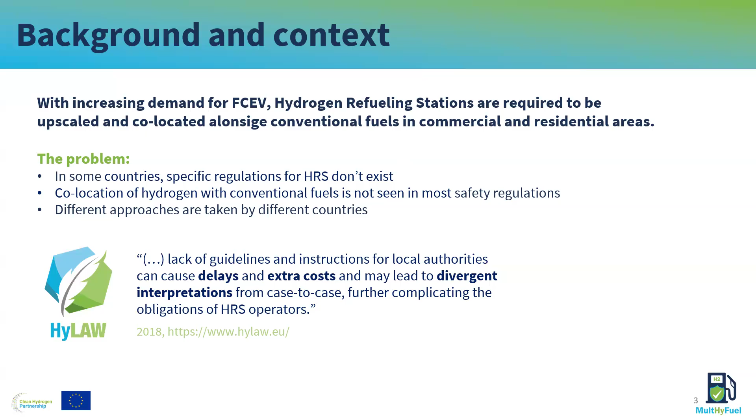The goal, as I mentioned, is to define commonly applicable, effective, and evidence-based guidelines to facilitate the construction of hydrogen refueling stations and multi-fuel refueling stations, in locations which would be suitable to have both.

So what we did was identify relevant gaps in the current legal and administrative framework, which I will present afterwards. We gathered experimental data from engineering research and leaks. We also engaged with relevant stakeholders, a lot of stakeholders, some of which are here with us today. We actually had over 100 applications for registration for this event, so a lot of them are interested.

And of course, we want to successfully disseminate the project's results, so they are available to everybody who is working in the hydrogen refueling and refueling stations sector.

This is our consortium. We have partners from all over Europe, as you can see. Hydrogen Europe is the coordinator of the project, as well as the work package leader of work package 1 and work package 4, where we engage with stakeholders and defined the legal analysis of the situation.

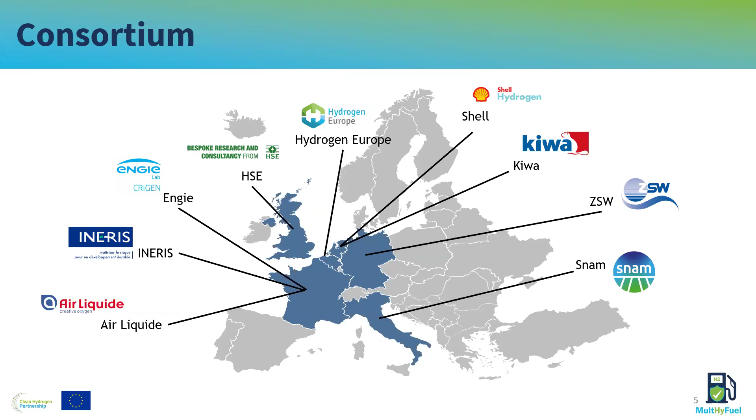Within work package 2, my colleagues will show you and present the practical research done with experimental data they obtained, to address gaps in current understanding of hydrogen refueling stations in general, not necessarily related to multi-fuel stations and co-locations. And of course we have work package 4, which is engagement, where we wanted to engage with the stakeholders.

So with refueling station operators and public authorities, to assist them in deploying this regulatory information and experimental data where they see fit, and how we can try to help them as much as we can.

The project started in 2021, which was quite some time ago. We ended up in September last year. Unfortunately, we had a couple of bottlenecks in between because of COVID, and some additional administrative issues, but we are here at the end and we're trying to present the final outputs, which will be uploaded for everybody's availability.

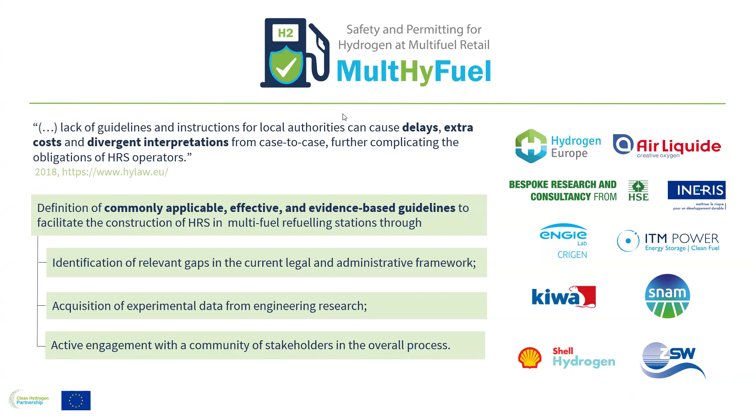So what we did was to examine 14 countries through 14 organizations that we got in touch with. So the national experts that we were in touch with, we asked them to provide us assistance in order to do the comparative assessment and gap analysis.

So we asked them to check the existing permitting requirements for HRS, the risk assessment regulations and methodologies, safety or separation distances, and intervals and content of equipment maintenance. So I marked here France and Netherlands.

My colleague vastly provided information on these two countries. We had most details on these two countries in the last iteration process.

But I will show you the results of everything else as well.

So what we had as feedback is that we had 4 countries with specific HRS regulation and refueling stations which were deployed. We had 7 countries without specific regulation, but with refueling stations deployed, meaning that they had refueling stations implemented, but their regulation was actually based on some other regulation that was available for refueling options. We had, of course, 3 countries without any refueling stations deployed, which also didn't have any regulation implemented for this purpose.

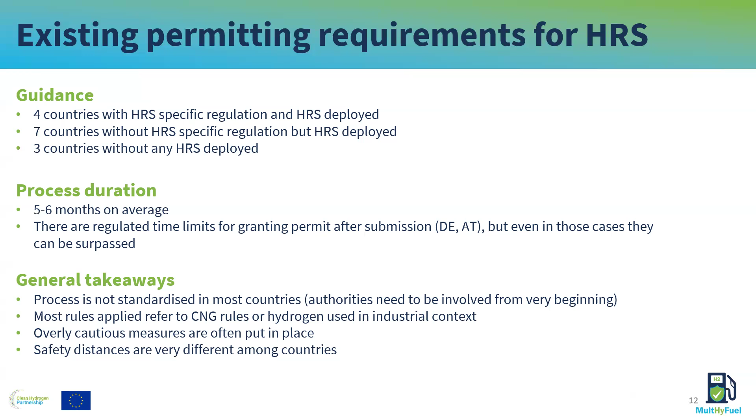Excuse me, Dinko. Apologies for the interruption. There are quite a few people in the lobby waiting to be let onto the webinar. Okay, thank you, Liz. Please feel free to let me know. As I mentioned, this is a bit of an issue since I'm doing this myself and it's challenging to check everything, but thank you a lot.

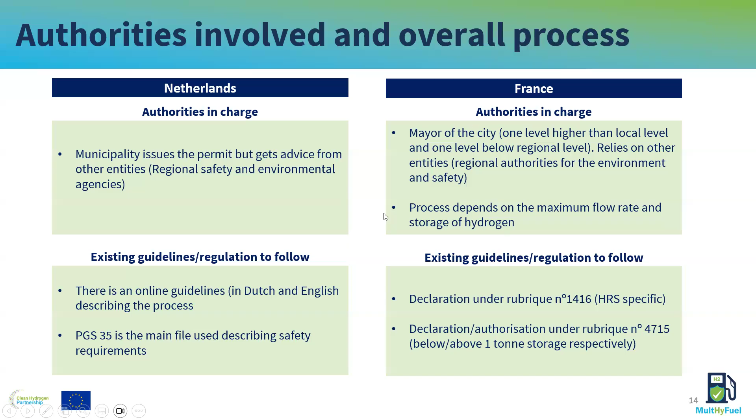Regarding existing guidelines or regulation that needs to be followed, in the Netherlands there is an online guideline with specific information, while in France there is a specific declaration focusing on the hydrogen refueling station itself. Regarding risk assessment methodologies, the Netherlands has the Seveso directive, which refers to ISO standards determining the use of quantitative risk assessment. In France, risk analysis is only mandatory for installations subject to authorization regimes, meaning more than 1 ton of hydrogen storage, if applicable. Below that, it's not required.

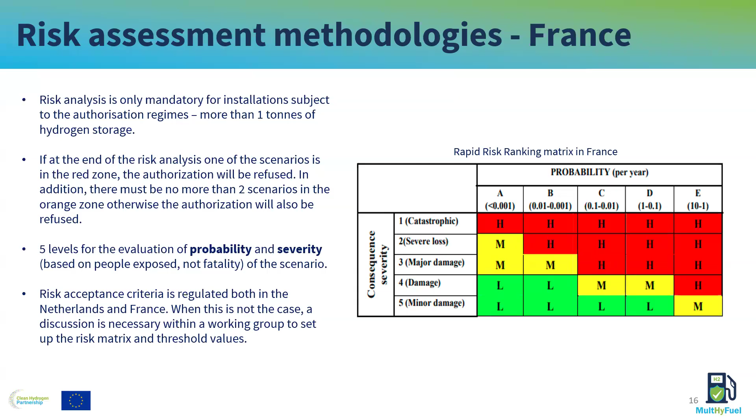I'm not going to go into details regarding these specifics because you can find them in detail for each specific country in the deliverable online, related to permitting requirements. Just as an example for safety distances, the distance between hydrogen storage and pipeline is determined in the Netherlands, while in France there is no prescribed rule. On the other hand, the distance between hydrogen equipment and other fuels is determined in France, while not in the Netherlands.

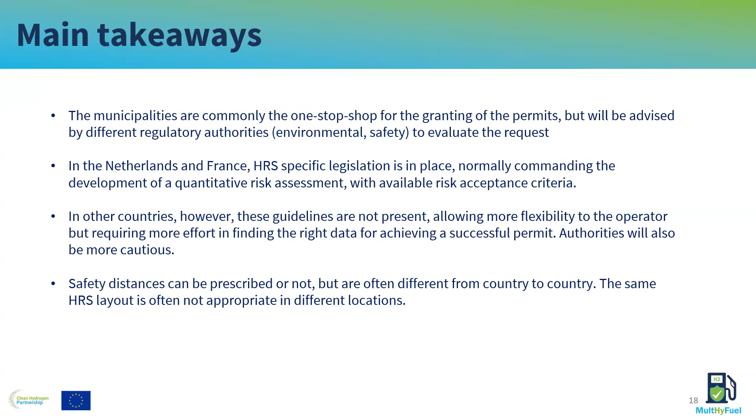The main takeaway from this small example is that some countries have specific hydrogen refueling station legislation in place, normally commanding the development of quantitative risk assessment with available risk acceptance criteria, while other countries do not have these guidelines. This allows more flexibility to operators but requires more effort in finding the right data for achieving a successful permit, including environmental permits specifically. On the other hand, this might be quite challenging because it doesn't give them step-by-step guidelines to implement this information and deploy the hydrogen refueling station.

As mentioned, you can find these detailed documents online: deliverable 1.2 and deliverable 1.4, on permitting requirements and risk assessment methodologies for HRS in the EU. We had the first version with the status in 2021, then the final analysis and comparison of results, covering what happened in the meantime, sometime in 2024. Both documents are publicly available online in detail for the 14 countries, which you can check on the website.

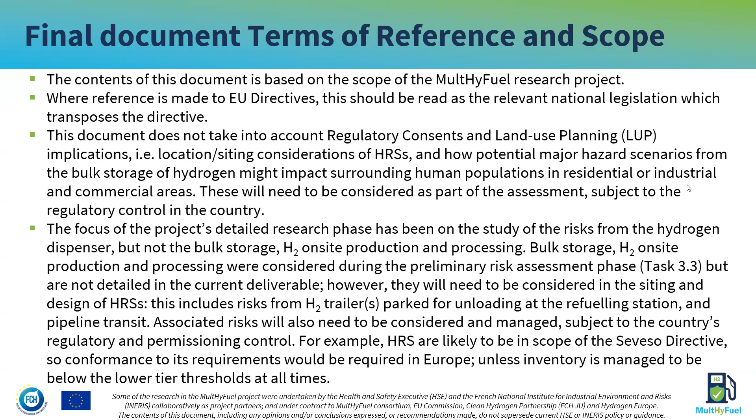Subject to the relevant country's regulatory and permissioning control, associated risks will also need to be considered and managed. For example, hydrogen refueling stations are likely to be in the scope of the Seveso directive, so conformance to its requirements would be required in Europe unless the inventory is managed to be below the lower tier thresholds at all times. Next slide please, Dinko.

Thank you. So we would like to stress that the experimental program within the project did not study liquid hydrogen releases.

Because of the project scope, the findings of the research reported in the deliverable may only be specific to the assumptions made within the risk assessment, consequence modeling, and conditions of the experiments conducted. For example, in our large-scale experiments using the mock-up dispenser system, the release of hydrogen was not sustained at a constant flow rate. There was a measured decay with time as a buffer tank was not used, whereas consequence models typically assume constant release rates.

In addition, weather conditions may have a significant influence on the dispersion results.

One other thing that is also worth pointing out before you read the report: whilst likelihood and potential severity determine the level of risk, the techniques to determine the severity, i.e. the methods to estimate populations exposed to the harm, was not part of the work. Instead, the focus has been on the consequence assessment techniques that form part of the risk assessment process. So what I'm saying will make sense when you come to read the deliverable.

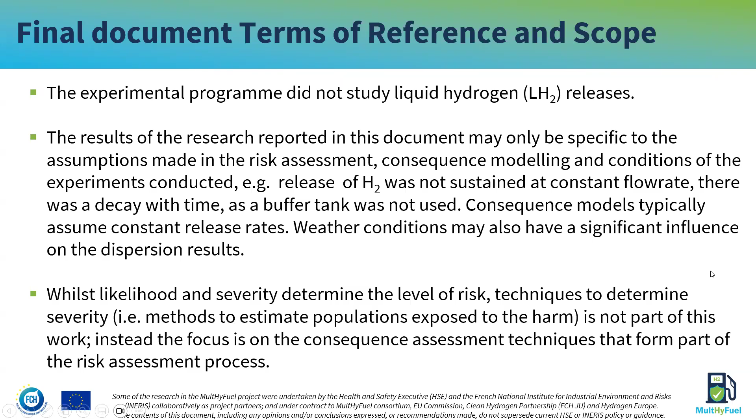The technical recommendations born out of the results of this project would be applicable to similar hydrogen refueling station configurations and dedicated equipment as those studied within the project, i.e. the three configurations covered and described at the start of section 3 of the document, and the assumptions behind this. So application to a larger scope will therefore require dedicated risk assessments and additional validation. It is also important to highlight that the research has been conducted at a high level, hence the findings and recommendations made in this document are at a snapshot in time.

However, we still believe that all the work we have carried out in the last four years and the resultant research findings have not only helped us identify some key technical recommendations, but as with all good research projects, has also helped identify remaining knowledge gaps, which themselves would need further research in order to address and feed into the development and/or improvement of various regulations, codes, and standards. More about this later.

And that's all I have to say really on the structure of the report and its terms of reference, hopefully setting out its scope and context. So I will now hand the floor back to Dinko.

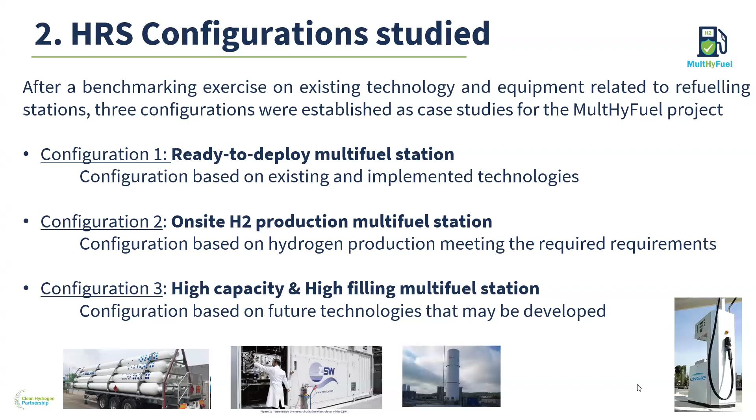You can see at the end the 3 hydrogen configurations. Here is configuration 1. For each configuration, I will introduce on the left part a process, and on the right part a layout. Here you see for configuration 1, the trailer and bottles supply the hydrogen.

We have a compressor because, as you see, the pressure in the trailer is between 200 to 600 bar, and we would like to reach 1000 bar. That's why there is a high pressure compressor, and after that two storages, high pressure storage, then a cooling system to be at the right temperature to fuel the car, and a dispenser. So here is the process.

Now looking on the right at the layout, you see there is one technical zone where you find the storage — the trailer storage, the high pressure storage, the compression skid, the chiller, and the control technical room. On the right side of this layout, you have the dispensers, and you see different colors.

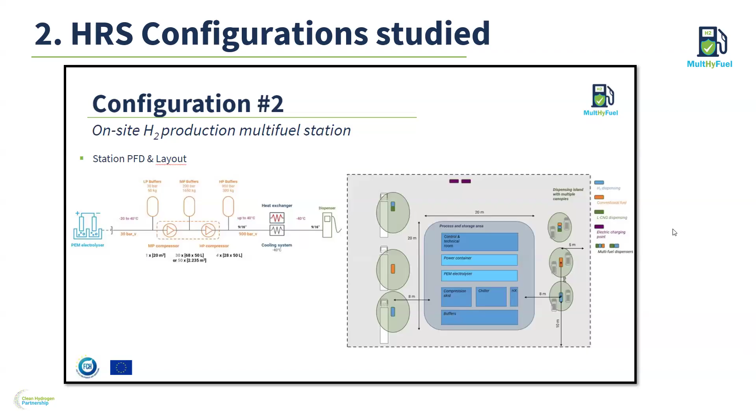On the right side layout, you see in the middle the process and storage area, the technical area, with a production section using a PEM electrolyzer and also the different compressors, storage systems, and chiller. On the left part you have a dispenser for trucks, and on the right part the dispenser for light vehicles, each fueling dispenser dedicated to some fuels.

So we determined, as we saw before, the different configurations. After that, we would like to make a state of the art on risk assessment methodology. To realize this analysis, we looked at scientific articles, but also used lessons learned from partners. We see that when reading these articles about risk assessment of hydrogen refueling stations, risk assessments were realized with HAZID methods or preliminary risk assessment methods. For the database to estimate likelihood, the most used databases were the Purple Book or HyRAM.

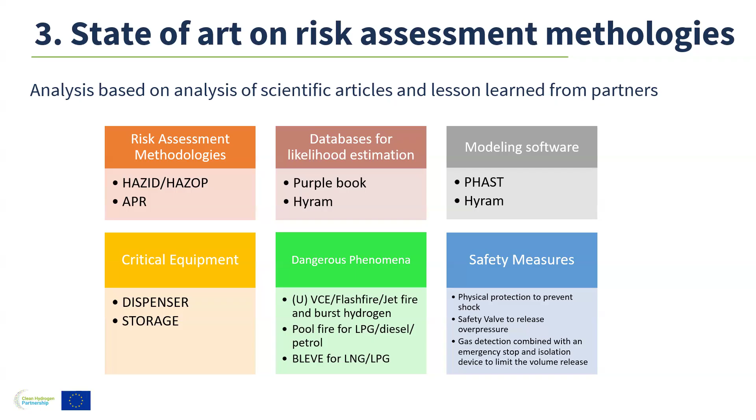The first safety measures recorded in this analysis: physical protection to prevent shock inside the hydrogen refueling stations, safety valves to release overpressure to a vent, or gas detection combined with an emergency stop and isolation device. Next slide, please.

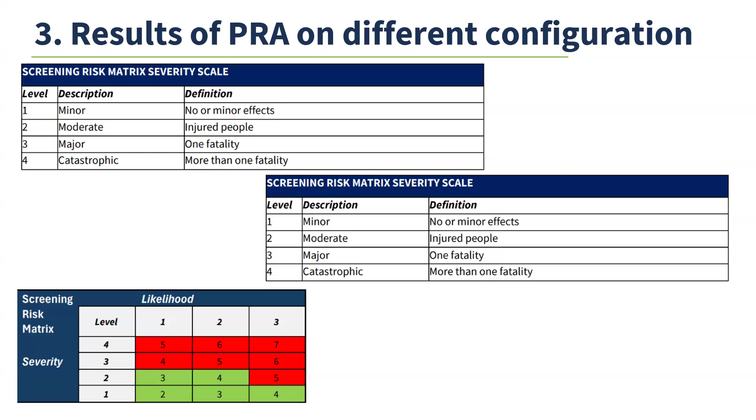Next slide please. So now if we want to rank the different scenarios, we use during the risk assessment different scales. Here you see on the left side the risk matrix for severity, so it was a qualitative scale, just to see, let's go from 1 to 4: 1 minor accidents to 4 catastrophic accidents, where you can have more than one fatality. And after that you have the likelihood system, and above, after we have the criticality, we have both the likelihood and the severity.

What we have in red is because as soon as we have one fatality, we consider that we cannot open the hydrogen refueling station. So here at the end of this analysis, we have 258 dangerous phenomena.

As you see in the different configurations, we have mainly four dangerous phenomena for the three configurations: fire, jet fire, flash fire. We can also have explosions, dangerous phenomena like VCE, UVCE. We can also have asphyxia, fireball, or whipping of hose. So it's common for the three configurations. We also have some dangerous phenomena specific to liquid hydrogen, or others specific for the electrolyzer, like fire due to oxygen enrichment.

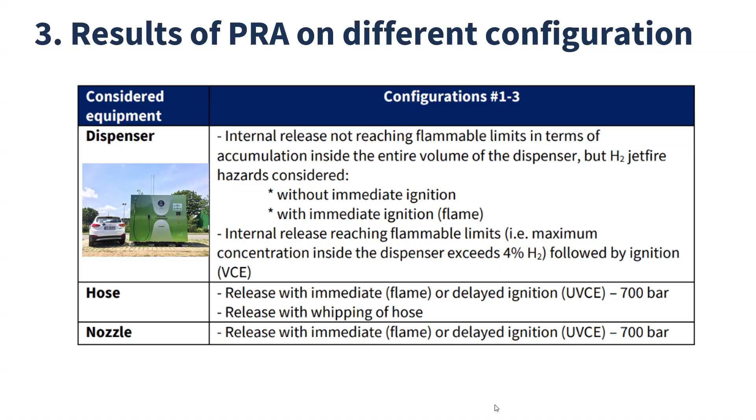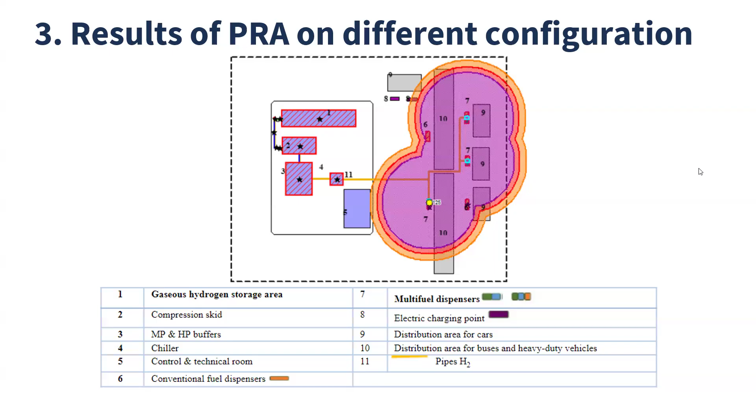Next slide please. And yeah, here with PHAST we determine the severity levels, from moderate for the lower to disastrous for the worst, and we count the number of persons impacted, from significant lethal effect to irreversible effect. And we also, for each dangerous phenomena, use the scale at the bottom to identify the likelihood of each dangerous phenomena. So it's frequency per year, as you can see.

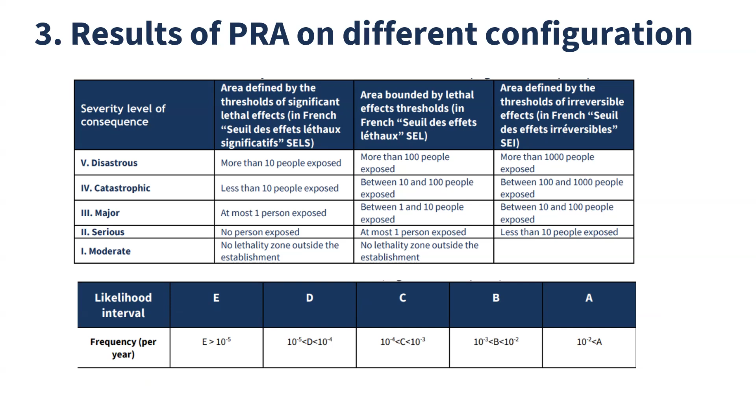I will detail just after how we make the likelihood. So for each dangerous phenomena, each scenario, we classify in this rank. As you see, there is the likelihood from A to E. A is more probable, E is less probable, and disastrous to moderate, so for the severity.

In red, it represents where risk reductions must be implemented. We cannot keep a scenario in this zone. In orange, it's an intermediate risk zone, and we must implement some measures to be as low as reasonably practical. We have to establish good practice if it's possible. So that's the scale we use. Next slide please.

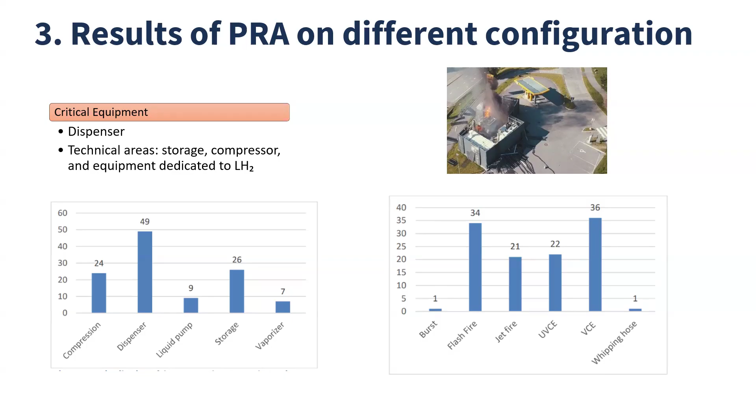Now I will focus on the likelihood. So the estimation of likelihood is a key component of risk assessments. There are a number of different approaches that can be included, but here you see the three main approaches: the frequency statistic, derived from past incidents.

Commonly held in generic failure databases, what we see just after - the Bayesian statistic, which combines both objective and subjective data based on expert judgment or lessons learned from past incidents, and the reliability of structure approach, which combines physical characteristics and probability of human error independent of past incidents.

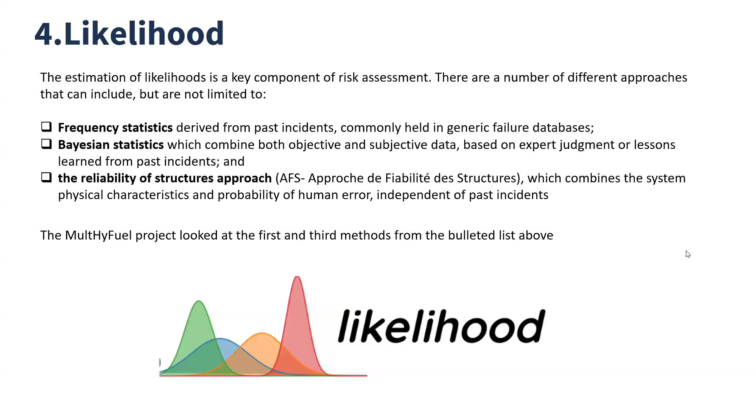In the MultHyFuel project, we use two different methods: the frequency statistic for the first one, and the third one that I will show you just after. Okay, next slide please.

Next slides please. So as you can see, for the generic failure database, the strength is that it's very simple to implement. It's very generalizable. We consider failure modes specific to mechanical components.

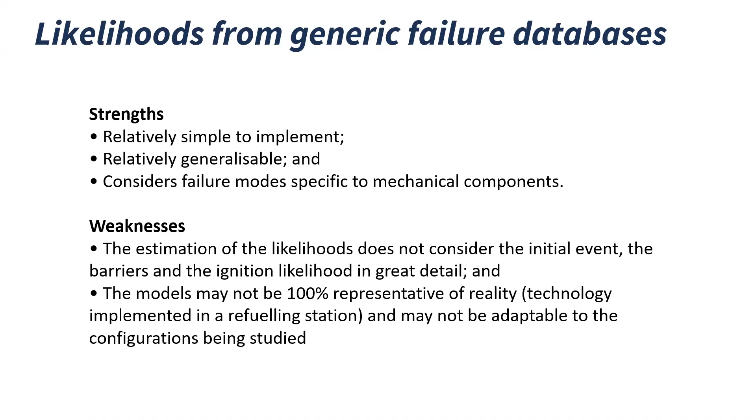So next slide please. That's why we try to have another approach: the reliability of structure approach. Here we like to have an analysis based on the components of operations and to see what can happen. So here, for example, we can have mounting mishap, fatigue, misuse, wear, corrosion, and tightening. And for each different fact we estimate the probability.

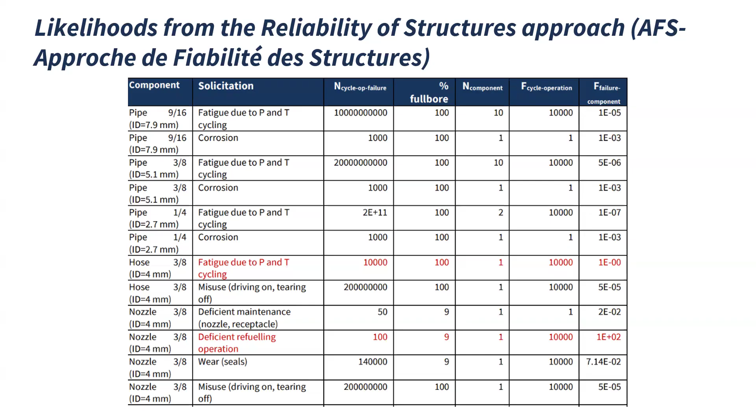Next slide, I will show you in the tables. Here you see the results. So you have the different components on the left side, the different solicitations - fatigue, corrosions. And here on the right side you have the failure of a component. You see, for example, that hose or nozzles are here in red and have a high probability to have failure.

Next slide please. So this strength of this method is taking account of the failure mode specific to each mechanical component. We have a possibility to carry out sensitivity analysis and optimization of certain parameters. We have a quantification of specific degradation mode for each component. We give an accurate picture of the impact of each cause and mode of degradation on overall equipment failure.

But the weakness - it requires a good level of knowledge of mechanical and probabilistic models. There can be significant uncertainty in the numerous input data and also on mathematical models. The models may be difficult to generalize and apply to other configurations. And the deterministic approach and the results correspond to a lifetime, and does not allow you to benefit from the advantage of a probabilistic approach. Next slide please.

So for the conclusions, we developed a new approach for the reliability of structure. We developed a detailed analysis of degradation modes depending on the component present in the system. This approach is new and can be developed in new technology systems. It could also consider more representative estimation of likelihood for hydrogen refueling station accident scenarios. But however, this approach...

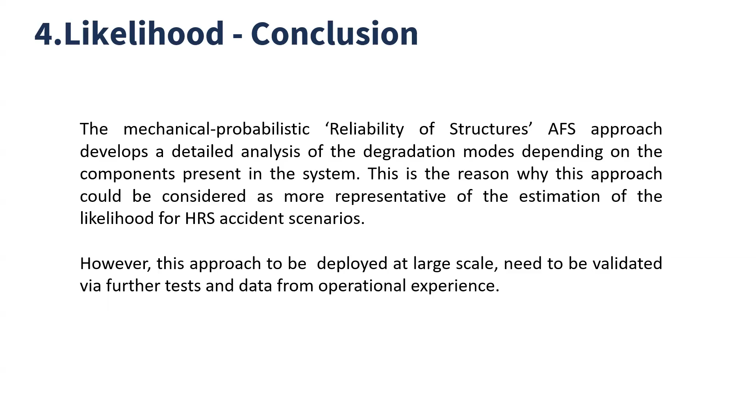We're going to move to the next part, which is the experimental findings that we got. So we heard about the methodological approach, and now we're going to hear about the findings. We have a recording of our colleague Louise, which we will play, where you can see the experiments that were conducted during the project activities. I'm going to find this and start the video. If you don't hear it, please let me know, but you should be able to hear the recording.

I'm Louise O'Sullivan from HSE, the Health and Safety Executive in the UK. I work at the Science and Research Centre at Buxton, and today I'm talking about fire and explosion hazards on a forecourt. I'd like to state as a disclaimer that this presentation doesn't form policy for HSE and isn't current HSE policy guidance. Also, a bit of a noise alert: the third video in contains noise, so if you'd like to adjust your own volume at that point, please feel free to do so. If you're in a shared office, it can be a bit disconcerting for others when they hear that.

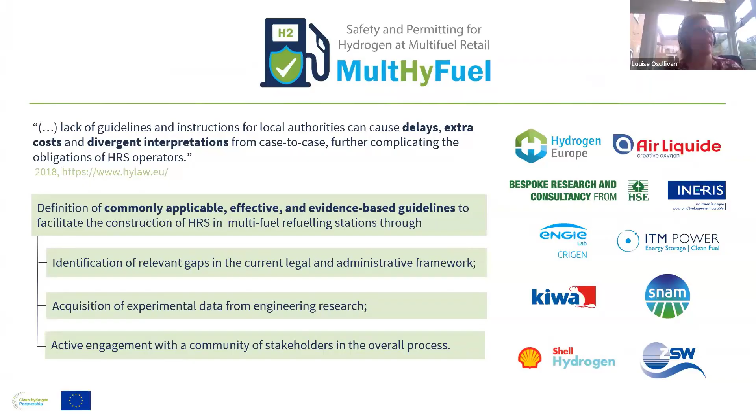Next slide, please, Joanna. Thank you. As Christophe explained to you before, we're working as part of a full consortium on Work Package 2, working with other Work Package 2 leaders, Ineris, Kiwa, ITM Power and Shell, amongst others. Our work has been undertaken to determine leakage frequencies, flow rates and the extent of hazardous zones for faults on HRS plant, as shown previously. But also we've conducted experiments to demonstrate the effect of hazardous occurrences on hydrogen dispensers and how this affects different dispenser types on a forecourt and multi-fuel forecourt scenario.

So how this affects both traditional hydrocarbon fuels and also looking to the future. In the final part of Work Package 2, we will test the performance and reliability of key safety barriers, as identified by Christophe earlier. We've done a little bit of that so far, and I'll be able to show you that in this presentation as well. Next slide, please, Joanna.

So we had to design an experiment, which is quite difficult in terms of a multi-fuel forecourt. We had to work on the experimental design, and we also had to work with other Work Package 2 collaborators to provide experimental evidence as to the effects of hazardous occurrences affecting hydrogen dispensers and other dispensers on a multi-fuel forecourt. So we came up as a consortium with a group of scenarios that could be foreseeable on a multi-fuel forecourt.

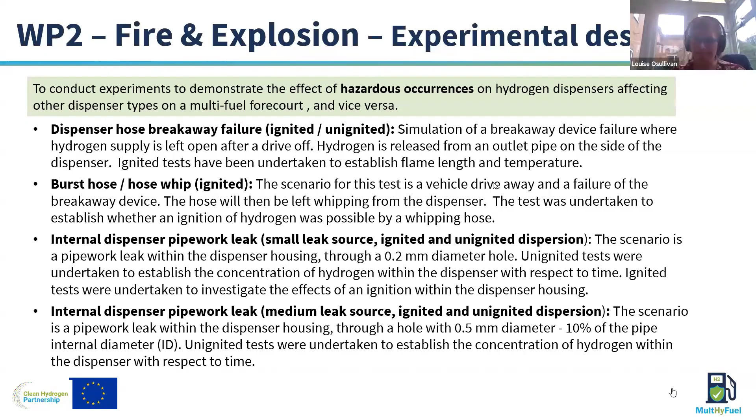We also did tests on internal pipework leaks within the dispenser housing, but placed an ignition source outside of that dispenser housing. A strong ignition source was used in these experiments, and I've got videos of that to come.

And the final experiment we did, because we needed to figure out - if this is a multi-fuel forecourt, a traditional hydrocarbon fuel fire could occur in close proximity to the dispenser, and whether that would cause a leak path on the hydrogen system and become a domino effect for the dispenser.

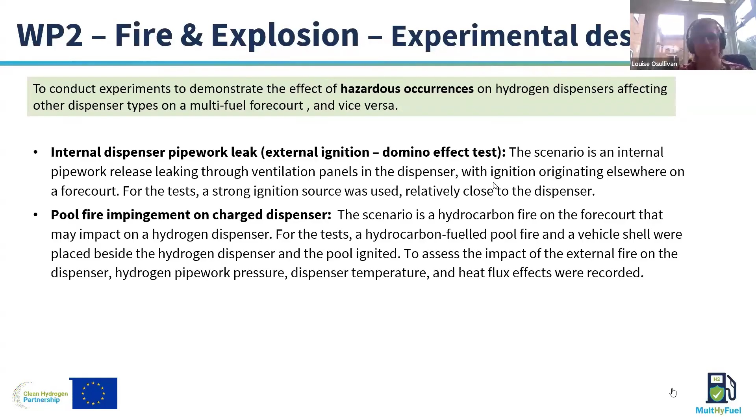Today we're only going to talk about 2 of those tests, as we only have 20 minutes. We're going to talk about internal dispenser pipework leaks with a size of 0.2 millimetre diameter, looking at both unignited tests - those dispersion tests - how much hydrogen can we get through a 0.2 millimetre hole into a dispenser housing with ventilation? What happens when we ignite those, both externally to the dispenser and internally to the dispenser? I'll be able to show you that today.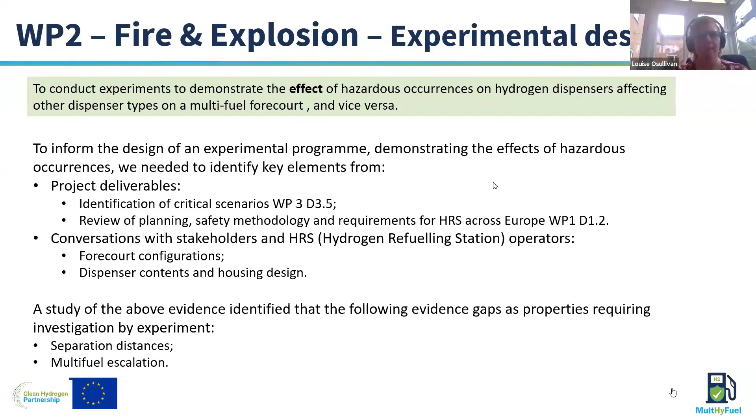So how do we go about this? How did we make this experiment reality? A simplified mock dispenser was agreed with a consortium of height 2 meters tall, 0.5 meter wide and 1 meter long. The housing was made with 1.25 millimeter thick 304 stainless steel, and the internal area is 1 meter cubed. There's ventilation holes at each side of the dispenser, with 2 openings, both top and bottom, on the lateral sides, each 120 millimeters by 100 millimeters. These are representative of passive ventilation that is currently used.

We needed to provide an experiment to estimate the effect of hazardous occurrences. So we needed to create those hazardous occurrences without impacting the safety of ourselves, the equipment, or others on our site. So remote operation of the facility was enabled.

A hose was used to act as a potential breakpoint between the high pressure facility, the image on your left, and the dispenser and simulated forecourt, which is the image on your right.

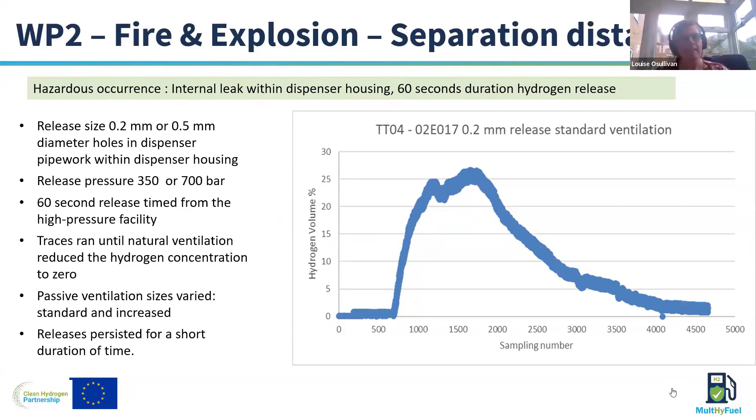This is the first video of today's presentation. We have a leak within the dispenser housing from the pipework at 700 bar with a 0.2 millimeter diameter hole. We've used a strong pyrotechnic ignition source, which was stationed outside of the dispenser.

So what you can see now is that strong pyrotechnic ignition source, hydrogen being released. You then see that hydrogen being ignited and burning back into the dispenser. We can see the flames there, so we know that the hydrogen within that dispenser is still being released, still ignited.

We can see here the temperature generated from that, even after the ignition source has gone and the release is still ongoing, we can see that two-thirds effect. So two-thirds of that dispenser housing is currently very hot. There's a fire in there, it's burnt back to the release, and that's continuing to persist. So that fire will go on for as long as there is a hydrogen source there.

What we can see as well is that the bottom third of the dispenser, which is where a lot of the equipment for this mock-up dispenser is, isn't seeing the same heat. So we're only getting an upward propagating flame, which we expect for hydrogen, but we do have a jet flame there.

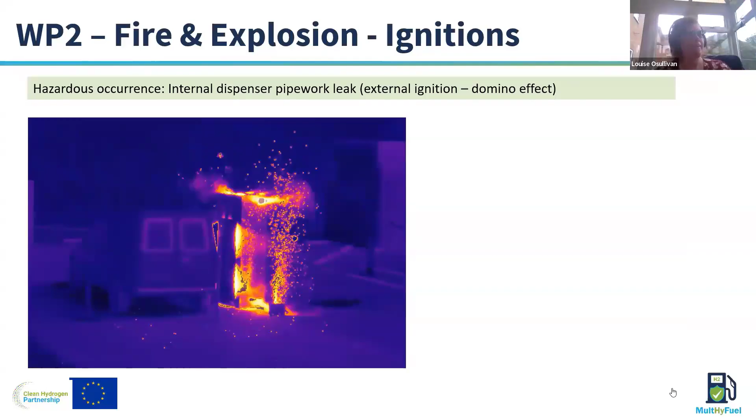But what did it look like inside when it was done? We can see at the bottom there, facing upwards, is the release point. Above that is an aluminium housing, which would usually contain hydrogen sensors and pieces of equipment. That's all burnt out because the hydrogen ignition burned back to the release and a jet fire from there persisted. That actually sprayed the aluminium all over the top of the dispenser as well.

Slightly above it was an electronics cabinet. That was actually a powder coated intumescent cabinet, and you can see that's been blown open with heat. You can see the intumescent coating has started to form its char, that started to burn away as well. So anything within that electronics cabinet, that's all been on fire, that's gone.

Has my sound come back?

Looking towards the dispenser, we can see that the roof of the dispenser has remained intact, but we do know that all the payment points and electronics within that dispenser will have been burned in this process.

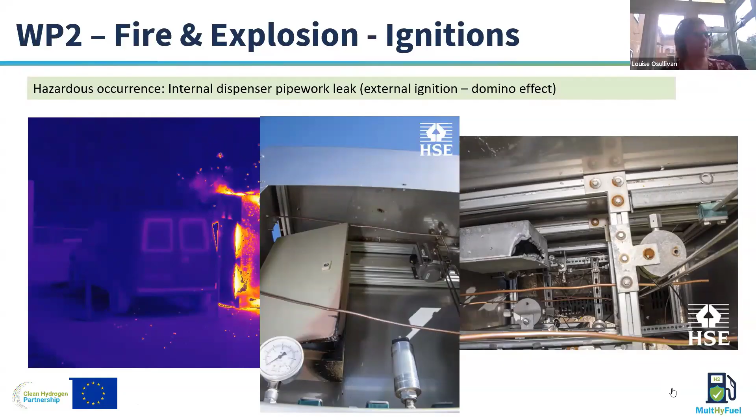This is a second test we undertook - a small pipework leak, 0.2 millimetre diameter hole, occurring on the dispenser pipework within the dispenser housing. We'd already undertaken non-ignited tests to establish the concentration of hydrogen within the dispenser housing, and we know that's around 26% in this case. We then did ignited tests to investigate the effects of ignition within the dispenser. This test was a 60-second release of hydrogen with ignition, along with another 60-second release of hydrogen.

This is in high speed, 1,000 frames, and what we're going to see is the internal ignition of the hydrogen. So what we've seen there is an internal ignition of the hydrogen at that 26%.

We've seen the door rapidly ejected from the dispenser housing, impacting the side of the van stationed there for refueling. You can also see the dispenser housing rocking backwards and forwards on its mountings - and this is on very strong mountings, which is something we will look to for work package 3. We've seen the rest of the dispenser housing distorted and what's happened to the lid there. So that's what happens with an internal ignition with no mitigation in that system.

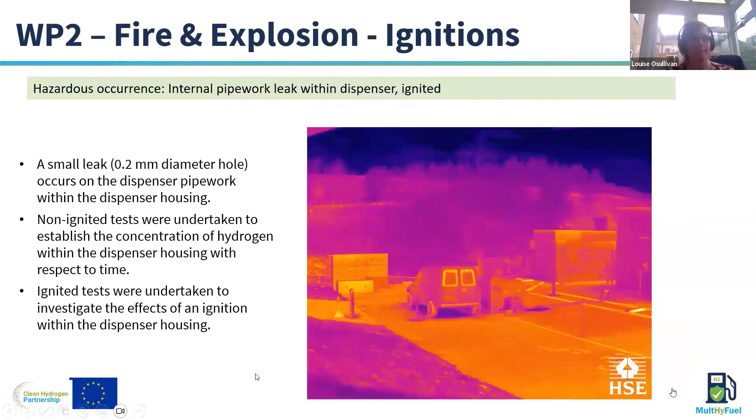So what does this look like when we look at it in our IR mode? Okay, so that's real time, so we can see how quick this event happens. There's no chance of escaping that situation.

The doors hit the side of the van. This is where we can really see with that persistent release what's going on. We can see yet again we've got a sustained fire, which is being burnt back to the release and continues to burn through the dispenser. We can see that damage to the dispenser, and the lid has been partially blown away, with flames coming through it and out from the front of the dispenser. But the fire hazard is located primarily around that dispenser and hasn't protruded further out. We see that the heating effect to the van is relatively minor - we're not really seeing that van heat up at this point.

So a few more photos as to what happened. The impact to the van was of sufficient force to warp the reinforcement in the van to the side of the wheel arch - we can see that's all distorted. If this were a car, the windows in the back door would have shattered with the impact force. The impact effects were also seen on the dispenser door, which when removed remained in the impacted shape. That shape you see in the van and in that dispenser door remained the case.

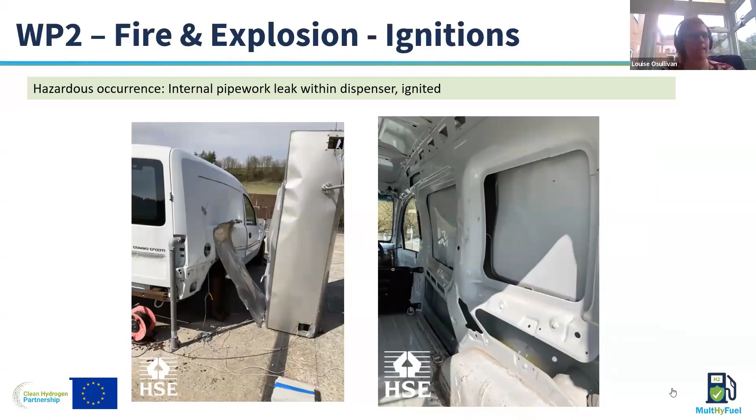So what happened to the rest of the dispenser? We can see there are several points where the dispenser has bowed and popped. The housing popped away from the skid, and that was connected at 6 points down the back of each panel - so it was really well attached. We could also see that the lid on top of the dispenser, which we had used for increasing ventilation, has also popped away from its fixings - there were 6 of those but it hadn't fully removed. I think this is partially due to the vent line in the top not occurring, and also that front door provided all the pressure relief needed for it to remain partially attached. But it was a large amount of pressure generation in that system.

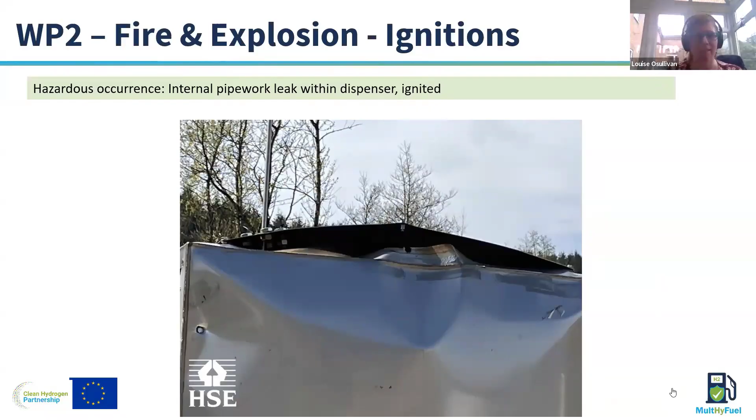The pressure wave exerted on the forecourt was not sufficient to cause primary blast injuries. However, secondary blast effect - i.e. impact from the dispenser door or a structural forecourt item which has been impacted by a piece of the dispenser housing - would be sufficient to cause serious harm or fatality. The ejection of the dispenser door occurred with overpressures of 620 millibar. The distance between the van and the dispenser was 0.8 of a metre.

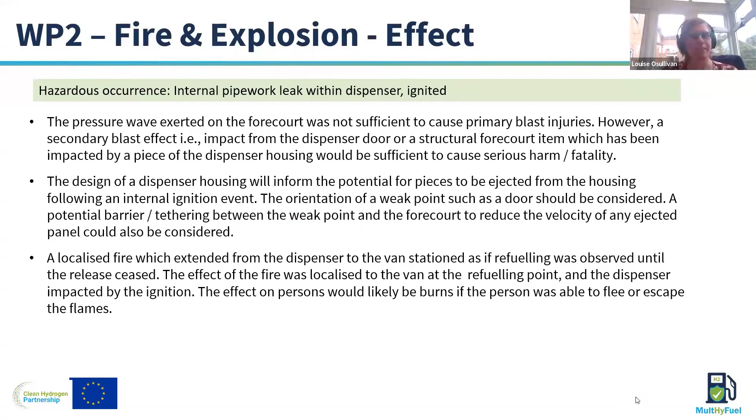So we started to talk with Christoph about what mitigations could be used to prevent the most hazardous consequences on a forecourt. So we installed a foil blowout panel at the top of the dispenser, replacing the original steel lid. We did the scenario again to determine whether this was adequate mitigation of the scenario. This is the video that's got the noise on. So if you're prepared to reduce your noise levels on your own control, Joanna, if you want to press go.

And if we stop there, Joanna. Thank you. So what did we see there? We saw that the top foil panel blew out as we expected it to do, to provide that mitigation. We saw that the door distorts with the pressure generated from an internal ignition, but the door wasn't removed. So the inclusion of a foil panel did prevent ejection of the door. It gives a bit more possibility of escape, and it's preventing some of those secondary blast effects from occurring. The dispenser also remains on its mount. We haven't got a rocking dispenser this time. We've got a more controlled situation.

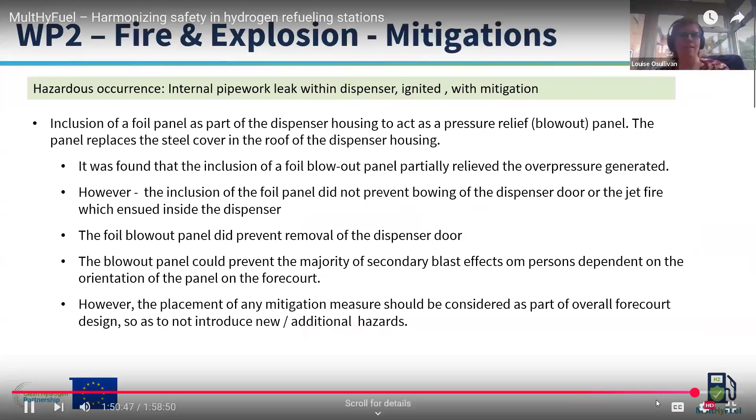So what we saw, the inclusion of a foil panel as part of the dispenser housing to act as a pressure relief or blowout panel, did improve the situation. We found that it partially relieved all the overpressure generated. However, it did not prevent the bowing of the dispenser door or the jet fire which ensued inside the dispenser. So we still got that jet fire, we still got big damage inside the dispenser housing.

The blowout panel could prevent the majority of secondary blast effects on persons, depending on its orientation on the forecourt, and that's something we really need to be mindful of. However, the placement of that mitigation measure should be considered as part of the overall forecourt design, as it could introduce different hazards.

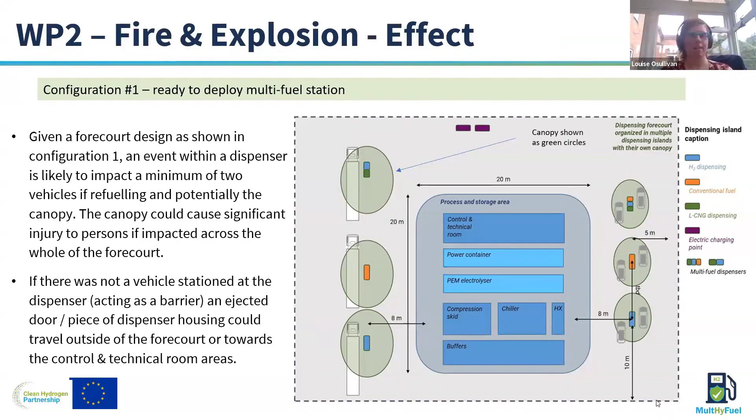So we spoke about, and Sebastian presented earlier, the different configurations. This is configuration one, a ready to deploy multi-fuel station, and the green circles there are individual canopies as shown. So if we think about how this may affect the results we've seen, and may affect the deployment of a multi-fuel station. On the right of this picture, you can see there are multiple dispensers in a line between the cars. And obviously, if you're getting a blowout of a dispenser such as that, there is potential for that to escalate to other dispenser types and potentially increase the likelihood of a domino effect.

If there was not a vehicle stationed at the dispenser acting as a barrier, that ejected piece of the dispenser could travel outside of the forecourt or towards different technical and control rooms as well.

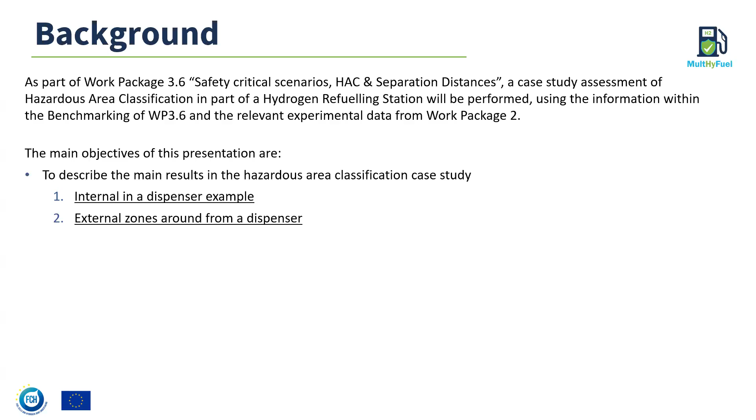Excellent. So next slide, please. So what I am going to present is part of the work that we did as part of Work Package 3.6, that was basically using the good practices, the standards, but in addition, relevant experimental data from Work Package 2, in order to create examples of hazardous area classification. We divided this into internals of the dispenser, what will be the zone inside the dispenser for a specific type of release, and external zones was the second part, what will be the zone around the dispenser because of leaks or because of a vent scenario.

Before doing that, we did a benchmarking and reviewed different points, definitions, hole sizes, and methodologies for zones of the vent. The main aim was to gather a lot of information on hole size and use it for different applications. This is part of one of our deliverables. What we found was that there are several hole sizes used in the industry, most based on 2 or 3 specific values, but there is still some harmonization to be done, and some of that doesn't necessarily apply or were based on hydrogen technologies.

So if you can move to the next slide, Dinko, please. This is the standard suggested values, which depend on the operation, and they depend as well on the type of parts. So that goes from 0.025 millimeters squared up to, depending on the operation, 0.25 millimeters squared, or even bigger if there are other parameters.

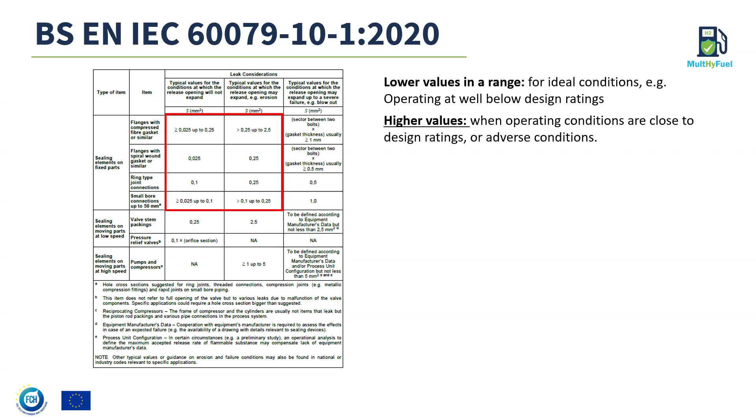So what we did was we took several of these values and tried to do a hazardous area classification example, using the different hole sizes that we found, in order to give a sensitivity and show what would be the effect.

So what we did was we followed the main requirements of the international standard IEC 60079-10-1. We followed the annexes in order to determine the zones and the degree of dilution, but as well, when we're dealing with external releases, we used Quadvent and Phast methods, and we determined the zone and the extent.

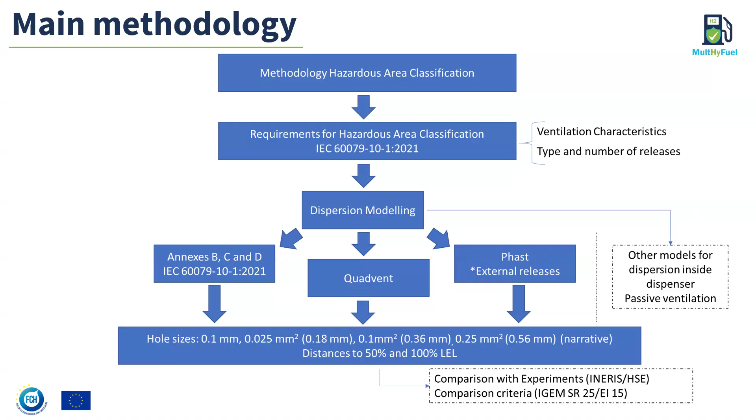The aim of this project is not to suggest a specific hole size to be used, but rather show what will be the conclusion using the different hole sizes found in the literature, and give some guidance on what parameters need to be considered in order to select this. But it is up to each designer to decide which is the most appropriate hole size that will define their technology. What is the main case?

We took a simplified volume, very simple. We assumed a rectangular one with minimum elements inside, and we determined the internal zone if there is natural ventilation. If we assume that forced ventilation is possible, what will be the requirements in order to move the zone? Then we determined external zones, especially from leak points around the hose, around the receptacle, and the nozzle. As well, we analyzed venting the system.

So I will mainly discuss here, because of time, the internal releases. If you can go to the next slide, please.

So, internal releases - what we did was try to determine internally what will be the degree of dilution. For that, we estimated the natural ventilation we expect to have, as well as what will be the release rate inside, in order to determine the zone.

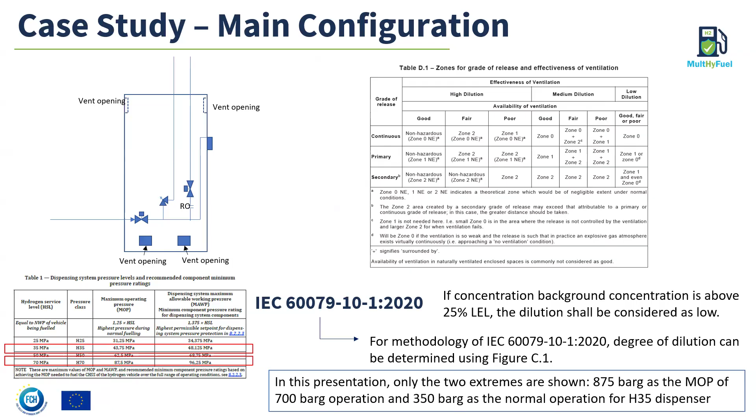We used the rated pressures that are in service, 70 megapascal and 35 megapascal, and did the calculation for the maximum operating pressure and the nominal pressure on each of them. We followed 2 main requirements of the standard: one is figure C1 to determine the degree of dilution, but also, in order to avoid a degree of dilution that is low, the background concentration needs to be below 25% of the lower flammability limit. Next slide, please.

The first estimation was to determine the natural ventilation within the system. So what we did was assume two different scenarios - this was made as well before this work, in another section of work package two, in order to determine the velocity of air if there are wind velocities of 1.5 meters per second or 5 meters per second at 10 meters, which is the standard height these are measured at, then corrected to the height of the vent. We assumed two different settings, rural and city. The standard does have some equations to determine the ventilation velocity.

As I mentioned, as part of this project, there were also estimations that can be done using CFD, to see if we reach the same conclusions based on the same assumptions and equations. So we determined what the ventilation was. Next slide.

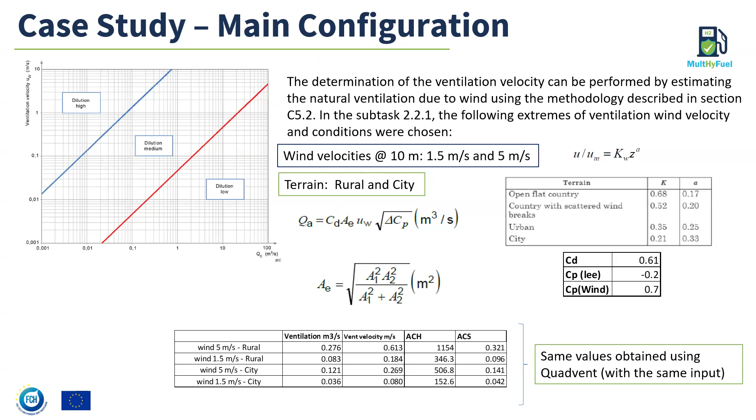So as I was mentioning, there are two nominal pressures that we analyzed. I am presenting here the extremes, even if they are not related to the same case: the maximum operating pressure for hydrogen operating at 70 megapascal, and what would be the nominal pressure for one dispenser operating at 35 megapascal.

Basically what we found is, using the figure from the standard for different leak sizes, we estimated what the release characteristics will be. With the ventilation velocity, we determined some of them will be within the consideration of medium dilution, especially for the lowest pressure.

However, when we check this with the condition of being below 1%, so 25% of LEL, or background concentration, assuming a really good mixing, which is already another assumption, only one of them will be within that. So most of them will depend on the ventilation velocity, which is very variable.

So the conclusion is basically that low dilution will be characteristic of these kinds of installations. This means that in case of a secondary release, with low dilution and the ventilation openings we assumed for natural ventilation, the most likely result is that it is at least zone 1 within the enclosure.

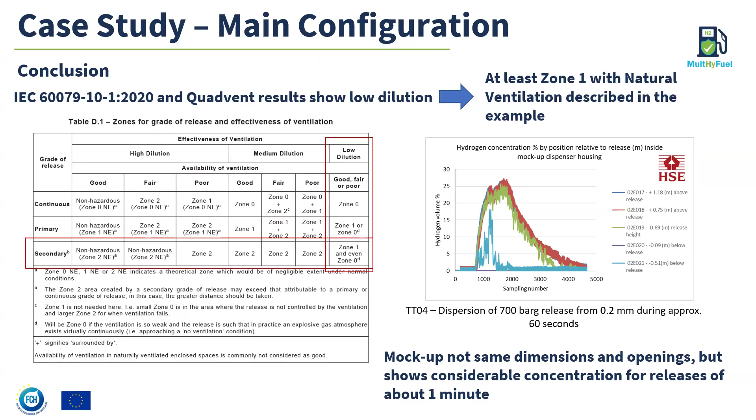If we move to the next slide please. In order to be able to have a lower zone, for example zone 2, additional ventilation will be required.

So if we calculate this, assuming perfect mixing within the enclosure, it will mean that we need considerable ventilation. At lower pressures, these are values that are considerable but possible. But if the installations could have considerable hole sizes for hazardous area classification, like 0.1 or 0.25 millimeters square, the ventilation rate will be very big.

And even for some dispensers already being able to provide any means of additional ventilation could not be practical. And if the hole sizes are considerable, it's just not possible. So zone 1 maybe, at least zone 1, maybe the final result anyway.

Next slide please. However, what we wanted to review is a lot of the current protocols, or let's say requirements, for hydrogen refueling stations. They require what is called a pressure hold test, or pressure integrity test, from the dispenser up to the vehicle.

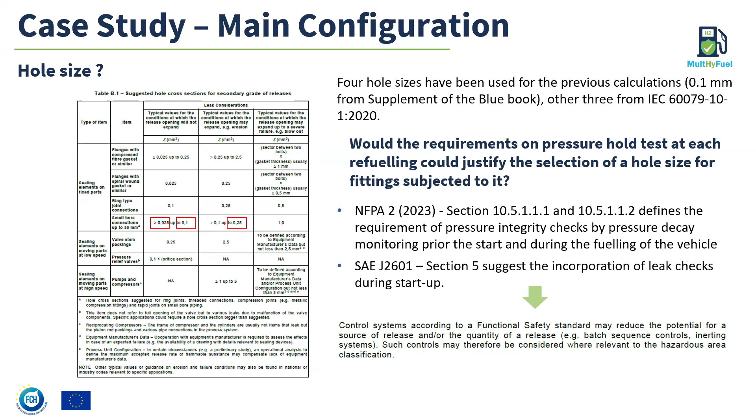So we wanted to analyze if this would have a potential way to detect leaks that are around the hole sizes usually used for hazardous area classification. Next slide please.

It will probably be a good idea in order to support, or at least continuously check, that there are no leaks. It's still limited. It's still a release given the pressure working.

However, parts that are still within the dispenser that are not subjected to the pressure integrity test—let's say upstream of the isolation valve—could potentially present bigger leaks because they are not tested. So this is something to be considered and reviewed, whether there are possibilities for everything within the enclosure to be continuously tested like that.

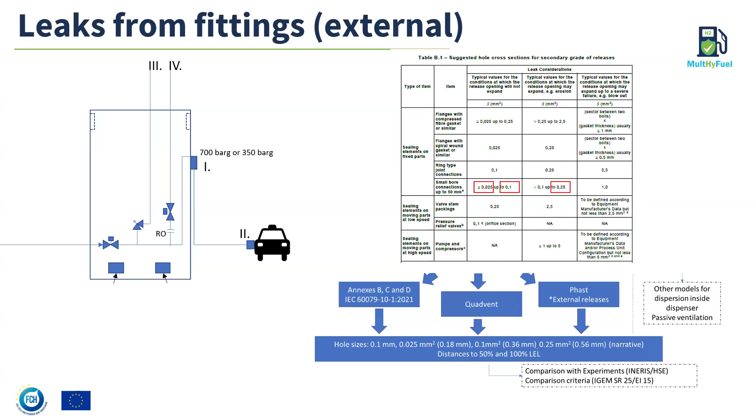So if you can as well go to the next slide. I'm not going into the detail here, but basically we used FAST as one of them with different atmospheric conditions, so different wind velocities and different atmospheric stability factors. Well, that will have an impact on the result. And therefore, then what we did was compare with Quadvent and the annex.

And if you can go to the next slide, we did this for different hole sizes and presented only two. Again, we are not suggesting a specific point, but the main thing that I wanted to show here is the annexes of the standard.

Quadvent doesn't consider any contribution of wind. It's basically stable or very low velocity conditions. So there are considerable effects when the wind velocity is considered, as with Phast, or any other software that could provide that.

There are jet and diffusive correlations in the standards, and the jet correlates quite well with the distances for Quadvent.

Another factor we analyzed here is the effect of temperature, and that's what we suggest to review very well. Lower temperature of the gases increases the release rate, and higher temperature of the ambient air limits the dilution externally. So choosing those parameters is quite important for the result, in order to provide a good description of what we actually expect to have. So yeah, those are the conclusions.

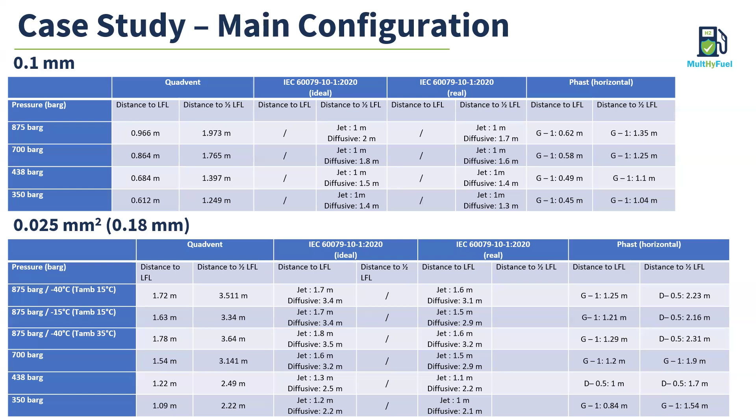Next slide, please. We reviewed as part of the work as well, after a refilling of the vehicle, if there is depressurization of the system up to an isolation valve, how will the zone around the vent be if there is a specific restriction orifice, or what will be the worst case scenario if there was no restriction orifice inside.

So what we also wanted to look at is what will be the conditions of the zone for different types of venting points, if you want, and we looked at this type of example.

So what we did was again review different atmospheric conditions and the effect of a specific restriction orifice that will limit the release rate during the dispersion. And therefore we did the same using different models.

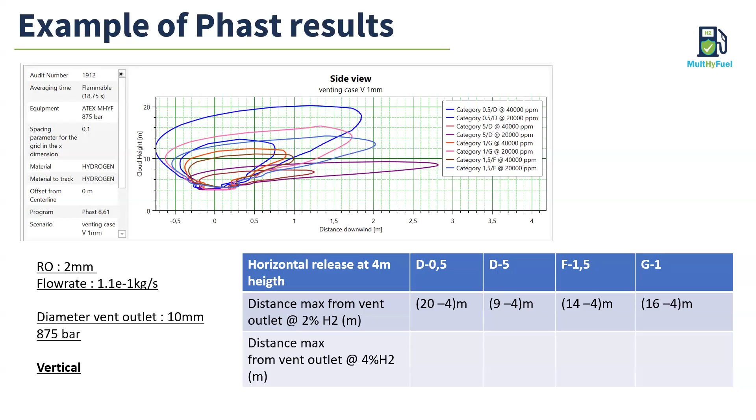However, a lot of these assumptions, we can go to the next slide please, were based on the fact that we basically calculated what is the release rate we will have at a specific pressure for the conditions of, let's say, a restriction orifice limiting and the additional pipework. What happens in reality in these conditions is there is a limited volume, so this will basically be the worst case scenario, and there is not enough volume to maintain the release rate that we're calculating.

Therefore, all of these are conservative, but what we find is basically that when the restriction orifice at this pressure is more than 1 millimeter, the extent of the figures of the annex of the standard are outside the range and are suggested not to be used.

And then for Quadvent, it's a simplified model, not necessarily developed, in my understanding, for this kind of venting release, but we will have a considerable release rate. Then for software or tools to consider the effect when there is a reduction, when the restriction orifice is there and we can't use the annexes, the release considered by the standard is of the same order of magnitude as Phast.

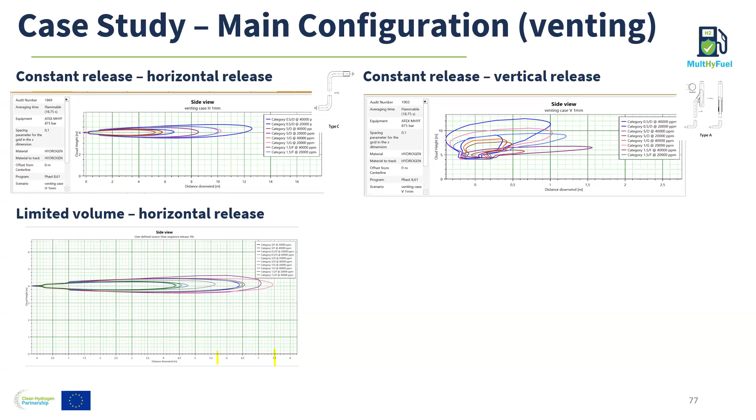We found that for the worst case conditions it will reach a 50% LFL zone horizontally. For this case it will be 7.5 meters. If assuming only pressure and the flow rate through it, it could go to 12, 30 meters. So it's quite conservative. And I would like to finish with some conclusions here. Next slide, please.

For the cases we analyzed in this example, at least in zone 1, where natural ventilation was determined, additional ventilation will be required. For each application, it is required to do an assessment of ventilation and release rate, because there are a lot of variables that will affect the result. Non-hazardous zone classification in the dispenser is not possible, at least for the work we have been looking at, and any reduction of zone will require high flow rates.

The small hole sizes assumption is to be used with caution and must be well understood why. Pressure integrity checks in the dispenser are performed regularly and could be implemented in several parts to improve the leak rate or reduce the leak rate. External sources should consider a safety factor relative to the lower flammability limit. I will come back to some of these assumptions.

In conclusion, the zone will be very dependent on the hole size externally, but also on the type of software, depending on the assumptions behind it. Some software has the ideal gas assumption, which does have an effect, and some software can account for the effect of wind, which will affect the extent of the release. With that, I will stop here and give the word to my colleagues.

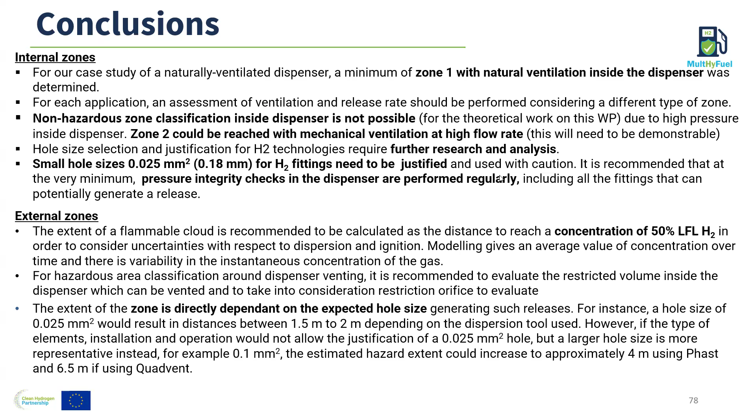Thanks, David, for such a quick overview of this extensive example. With that in mind, we go to the next section with the recommendations that we developed, which are the main part of this deliverable. I will give the floor to Nick from ITM to go through a couple of recommendations we would suggest. The extensive and detailed information can be found in the deliverable that will be uploaded online afterwards, but we tried to summarize as much as we could in this short time. So, Nick, the floor is yours.

Thank you. Thanks, Tinko.

Just to give a trajectory for where we intend to take the recommendations from the project: you may be familiar that ISO TC197 is the main ISO standards committee for development of standards and technical guidance for hydrogen technologies. The three most applicable documents we believe this output is useful for are ISO 19880-1 for gaseous hydrogen fueling stations, covering general requirements; ISO 19880-2, recently published for dispensers in gaseous hydrogen fueling stations; and ISO TR 15916, which covers basic considerations of safety of hydrogen systems.

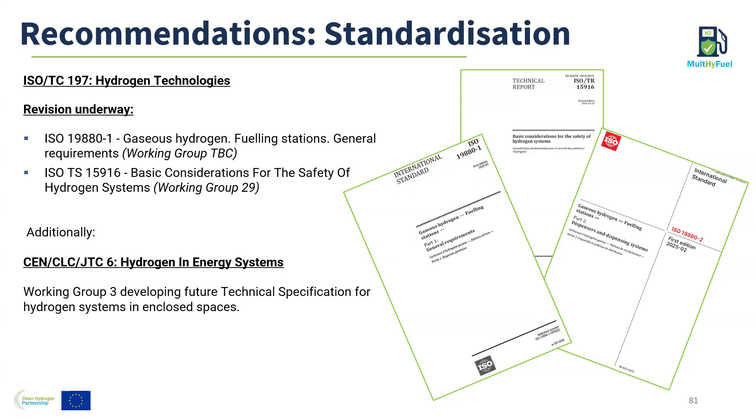Two of these documents are currently under revision: 19880-1, anticipated to be revised in the near future, and TS 15916, which is undergoing revision as a technical specification in Working Group 29 of TC197. Additionally, CEN-CENELEC Joint TC6, a European committee covering hydrogen in energy systems, has Working Group 3 developing a future technical specification for hydrogen systems in enclosed spaces—and the dispenser is a prime example of an enclosed hydrogen system. Finally, the explosive atmosphere side of things is covered by IEC TC31 within SC 31J, in IEC 60079-10-1, which is also under revision. We're trying to contribute to the development of that, either the next version or a future version after.

So moving to the next slide, this is a summary of the recommendations for the dispenser included in the deliverable we'll share soon. As you saw from Louise's videos, it's critical to include openings or apertures in the dispenser design, both for natural ventilation and explosion panels, which we'll come to in a minute. Openings and apertures for natural ventilation and wind-reinforced ventilation are essential to reduce the potential for accumulation in case of a loss of containment, particularly a smaller loss of containment. One recommendation from the project is that horizontal ventilation apertures, particularly in the upper areas of the dispenser, are more efficient and effective to enable wind to provide ventilation, regardless of the wind's orientation toward the dispenser.

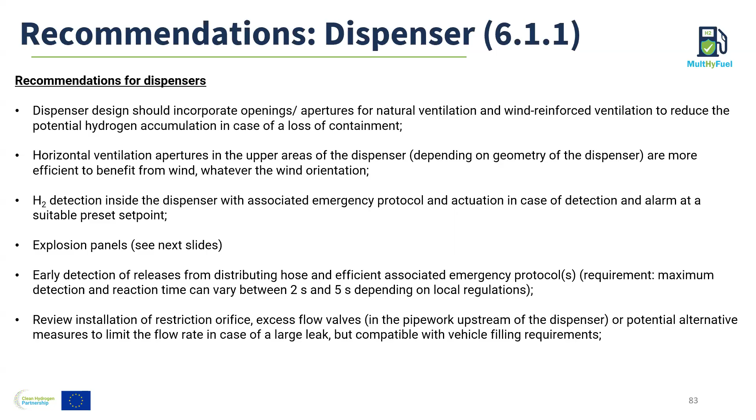Fairly typical in dispensers now, if not required, is the use of a breakaway coupling to isolate the system and limit the hydrogen inventory released in the case of a drive-away event. Also, an isolation valve within the dispenser that the control system can use to isolate the hydrogen system and limit the inventory release in the case of a significant loss of containment or failure of the breakaway.

David's talked about the hazardous area classification. That's important to make sure electrical equipment and other potential ignition sources are suitable for the zone in which they're installed, and to ensure grounding of the equipment in the dispenser, including the dispenser nozzle, is achieved.

There are recognised standards for explosion panels, and for the one meter cube dispenser housing used in the experiments, the vent areas are quite significant at 0.9 and 1.2 meters squared respectively. They give guidance on a methodology for determining panel size, but it's recognised this can provide a conservative result, and there may be empirical models that demonstrate smaller vent areas leading to the same reduction in overpressure.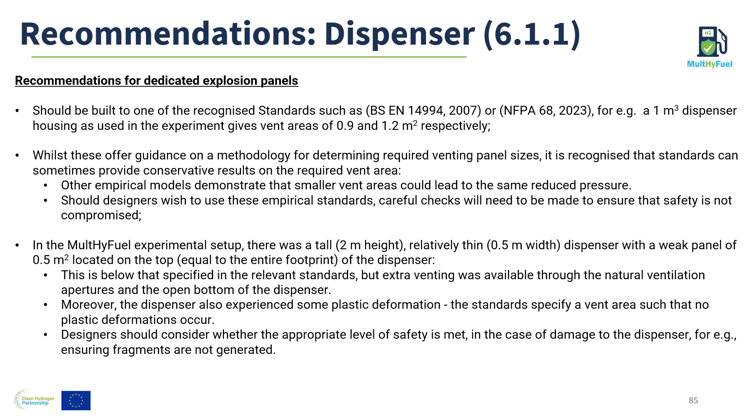So if people don't use the standards, the two standards we've suggested are examples that can be used for sizing explosion panels, and there should be some reliable modelling to demonstrate their efficiency and suitability.

One point we'd recommend is that whilst it's ideal for dispensers to be as short as possible, the location of the explosion panel should be above head height, at least 2 meters, to ideally orientate the explosion relief in an upwards direction, so it's not going to impinge on someone stood nearby.

From the testing we did, the vent size was approximately adequate for the size of dispenser we tested. When integrating a dispenser into a forecourt, you need to take into consideration other things in the vicinity that could impact on the efficiency of the explosion vent panel - any obstructions that could reduce their effectiveness, for instance walls or a canopy on top.

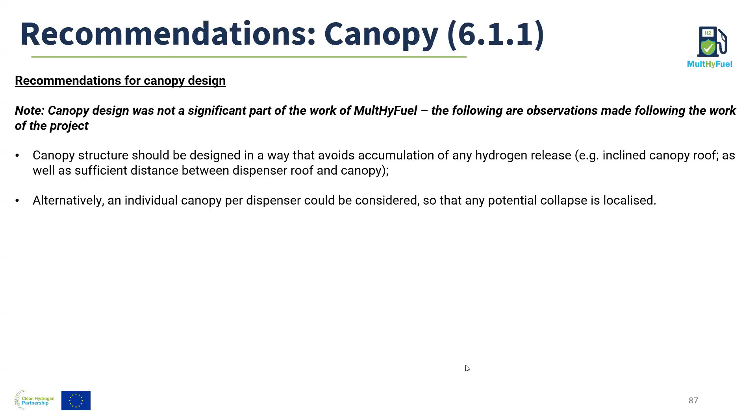Okay, I'll hand over to David now for recommendations on hazardous area classification. Thank you. I'll go quickly because we've discussed the hazardous area classification methodologies, defined down to releases to a lower flammability limit due to uncertainties on dispersion and ignition. Mainly, modeling gives average values, concentration over time, and doesn't necessarily take the instantaneous concentration of gas. It's recommended that designers consider applying a safety factor to a lower flammability limit.

The local conditions of wind and temperature need to be taken into consideration, as they may have an effect on the release rate and dispersion.

We reached the conclusion that hole size selection for hydrogen technologies requires further research and analysis, and this is something being discussed in different groups, as the values suggested in different literature or rough guidance are not well understood, and the derivation doesn't necessarily apply to some hydrogen technologies.

Small hole sizes, as I mentioned, need to be justified and used with caution, and it is recommended that, at a very minimum, pressure integrity checks are used within the dispenser and performed regularly.

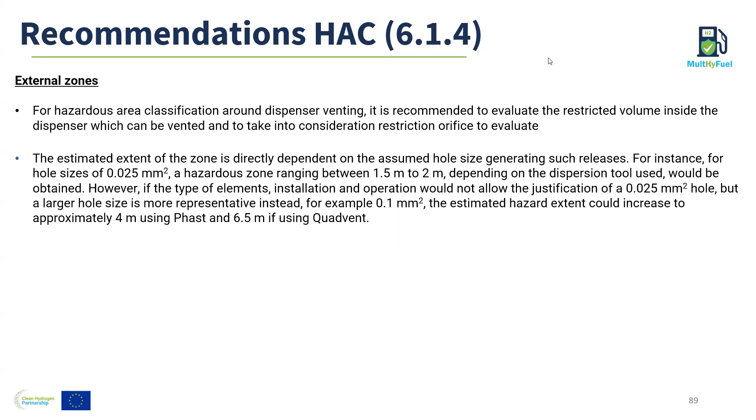I'll give the word to my next colleague. Thank you very much, Nick and David. We'll move on. As David mentioned, we need further analysis, and we have technical suggestions for further research, which will be covered by Sylvain again. I'll give the floor back to her to cover shortly the technical suggestions for further research and harmonization of good practices.

And are you here with us? Yeah, yeah, we hear you well. Yeah.

So I present technical suggestions for further research and harmonization of good practice. Next slide.

The prenormative research carried out within the confines of the MultHyFuel project led to the identification of some gaps in knowledge that may need to be filled in order to inform codes and standards. There also remain separate general knowledge gaps which were excluded from the project, which need consideration and investigation, some of which are already in progress by other projects, as you'll see next.

For example, indoor hydrogen response, HyResponder, PRESLHY, SH2IFT. Next slide, please.

As mentioned by Julian, there is no data in MultHyFuel provided for liquid hydrogen release, so we have to look also at other projects such as PRESLHY, SH2IFT, or MarHySafe, ELVHYS. Next slide, please.

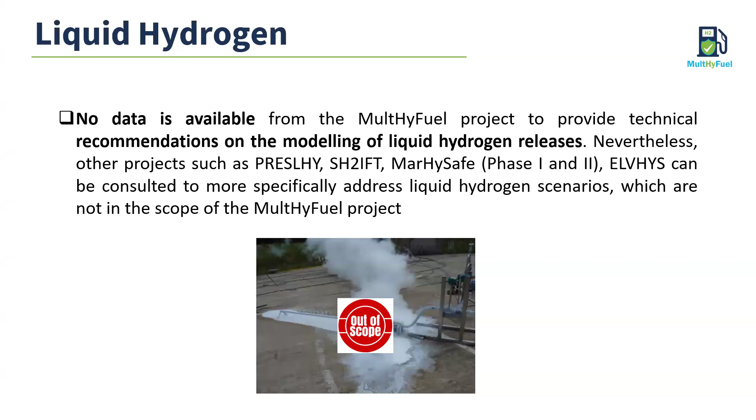The current work is based on the dispenser designs developed in the following norms. For new dispenser design specific considerations, a dedicated assessment should be carried out by the designer.

For specific atypical designs of dispensers, the design of venting explosion panels should be investigated further on a case-by-case basis. Also, the impact of internal obstruction level in the upper segment of the dispenser may be investigated in terms of the severity of the explosion in case of ignition.

On the safety of the forecourt, in the risk assessment of the installation we should consider detailed information from the supplier of the breakaway, for example the failure rates and modes, and also analyze potential human factors to ensure risk is kept as low as reasonably practicable.

In addition, there needs to be further research into the emergency shutdown system on multi-fuel forecourts. For instance, combinations of detection systems and shut-off valve actioning should be investigated with ignition of a release of hydrogen, taking into account the response time of the systems.

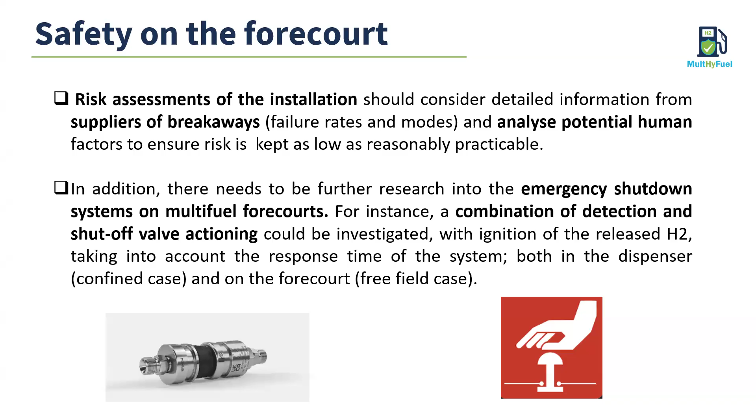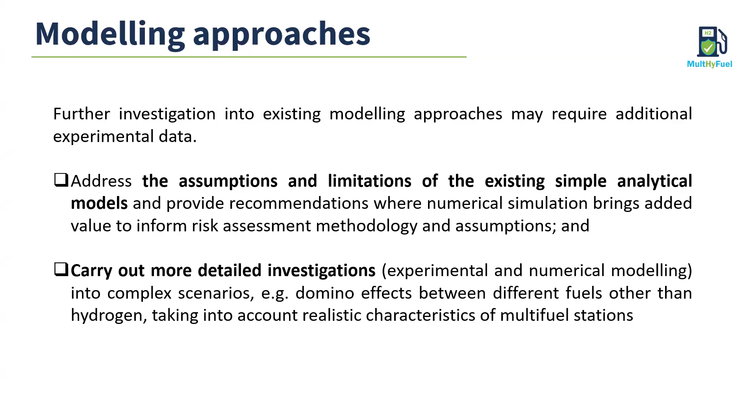About the modeling approach, further investigations into existing modeling approaches may require additional experimental data, to address the assumptions and limitations of the existing simple analytical models, and provide recommendations where numerical simulations bring added value to inform risk assessment methodology and assumptions. We also need more detailed investigations, experimental and numerical, into complex scenarios, for example domino effects between different fuels other than hydrogen, taking into account realistic characteristics of multi-fuel stations.

About the interaction between hydrogen and other fuels, we need investigation into the interaction between hydrogen and conventional fuels like gasoline with single dispenser compressor units. The integration of hydrogen with other conventional fuels on the same dispenser needs barriers to prevent or mitigate risks, taking into account the potential domino effect, including flame acceleration mechanisms and restrictor houses, for all types of fueling.

Further attention: the work conducted in this project has identified several specific areas that would benefit from further attention and exploration by relevant regulatory bodies and standards organizations. Good practice could be presented via an example multi-fuel hydrogen refueling station model with design layout recommendations to minimize fire and explosion risk, in compliance with national regulations, to protect people.

For example, we can reduce leak points to prioritize prevention and engineering control over mitigation, promote installations that are highly ventilated to prevent hydrogen accumulation and confinement, and ensure inspection of installations.

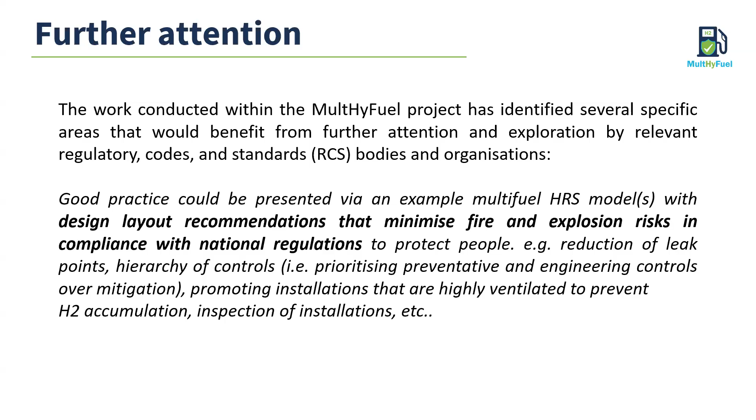About suggestions for engagement between national regulators and relevant stakeholders: it's necessary to have harmonization of scenarios and criteria, thresholds and leak size for the definitions of safety distance for multi-fuel refueling stations, to review procedural control measures to keep exposure of members of the public to a minimum in line with standards and guidance, and also the lower explosive limit could serve as a complementary or even primary basis for defining hazardous zones.

It can also be used as a reference for hazard distance, aligned with a preventive safety philosophy, and may address situations where an ignition source could be present outside the visible flame envelope. This approach could offer an additional layer of conservatism and robustness to risk assessment.

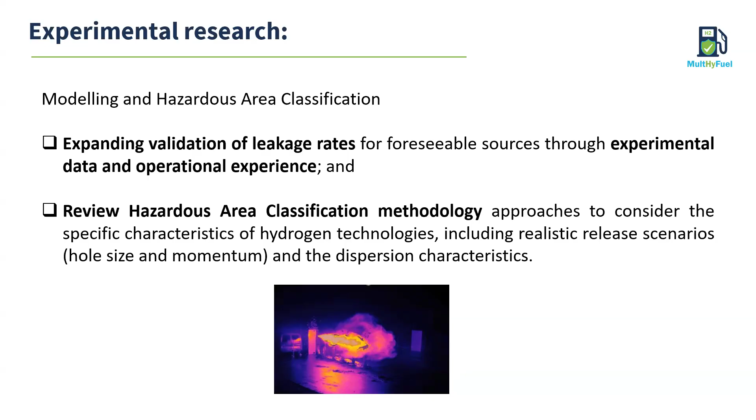About experimental research, modeling and hazardous classification: expanded validation of leakage rates for foreseeable sources through experimental data and operational experience. It's also necessary to review the hazardous area classification methodology approach to consider the specific characteristics of hydrogen technology, including realistic release scenarios hole sizes, for example, and the dispersion characteristics.

About likelihood, we propose a new methodology, but we need to validate this new methodology with more data. We also review the ignition probability, and we need to review the variables affecting this ignition probability to inform the risk assessment.

About safety barriers, it's important to develop inherently safe design for multi-fuel dispensers, to test the effectiveness of various safety barriers to achieve satisfactory mitigation response. For example, the detection response time for the full stop-leak chain, including detection and required action to stop the leakage, needs to be considered to determine the confidence level or SIL requirements for safety barriers to reduce the probability of hazardous scenarios.

It's also important to explore additional procedural control and maintenance to prevent or reduce potential static accumulation, for example regarding the involvement of members of the public in refueling operations. It's also important to develop ultra-rapid hazard detection that can react and isolate the system in a couple of seconds, for example acoustic detection.

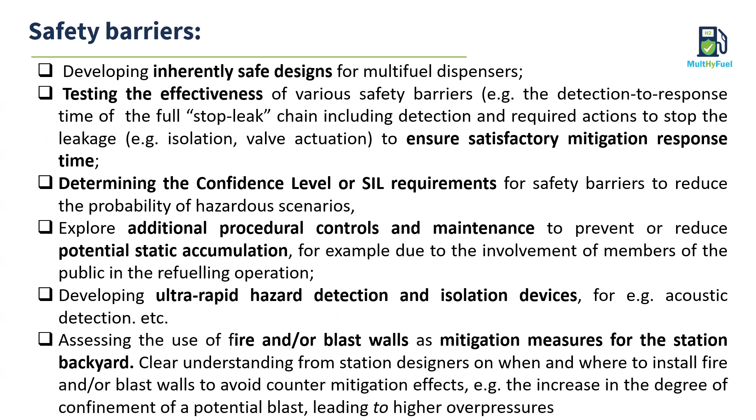About safety barriers, assessing the use of fire and blast walls as mitigation for the station's backyard, the technical area. It's important to understand from the station designer that when we install fire or blast walls, we have to avoid counter mitigation effects. For example, putting a wall can increase the degree of confinement of a potential blast, leading to higher overpressure.

About inherent safe designs, it's important to explore the feasibility of a single dispenser capable of handling all fuel types, including hydrogen, and to investigate different canopy designs for multi-fuel hydrogen refueling station facilities. Also to adhere to the principle of inherent safety for the design of the hydrogen refueling station and forecourts—for example, to minimize inventory in the backyard, minimize operator-based tasks, and eliminate the opportunity for error.

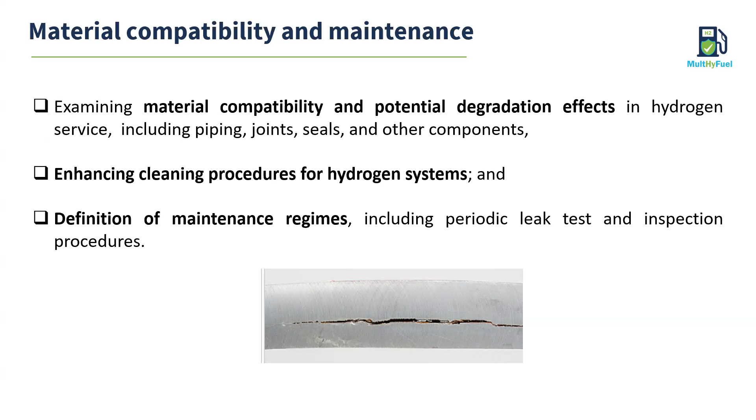About organizational measures and training, it's important to establish good practice in organizational management and to train all the operators around the stations—operators, but also competence management, and every person who does maintenance and assembly of hydrogen refueling stations.

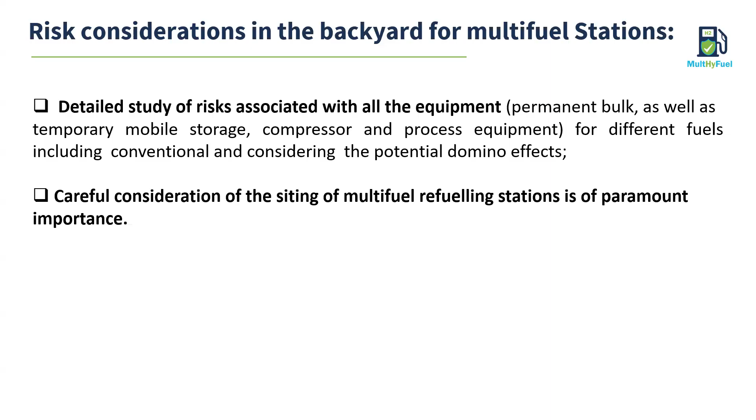So to conclude, these considerations emphasize the importance of thorough, multidisciplinary efforts to advance the safety, reliability, and efficiency of multi-fuel hydrogen refueling stations, and to ensure they meet both current and future demands. It's finished for me.